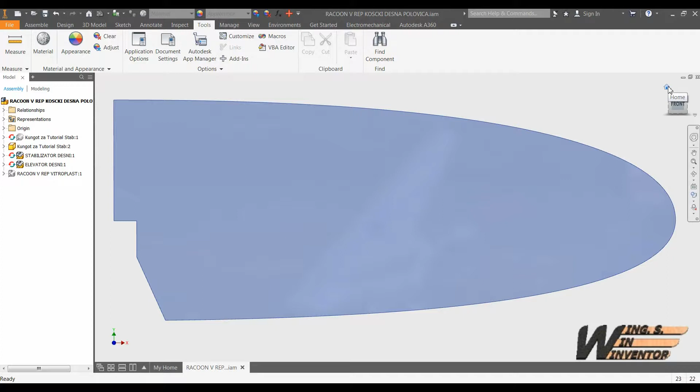Hello. In this video I will demonstrate how to get from this solid to the fully detailed final product without use of any sketch in a so-called take away modeling technique. In the episode number 4 we will design all the parts of the assembly in such a way that they will represent the puzzle which can be assembled together only the right way.

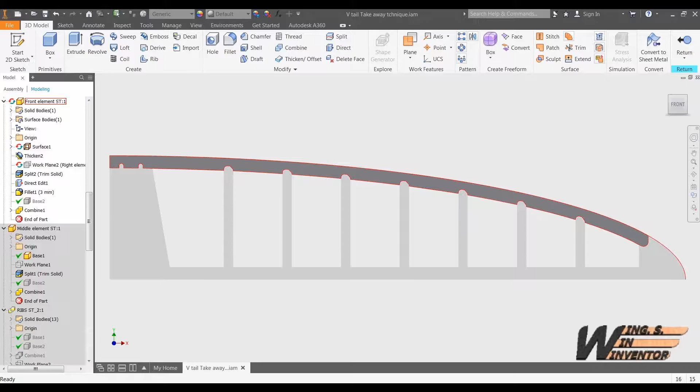We will remodel parts of the assembly utilizing direct edit tools. This is the fastest and most convenient method for changing object shape.

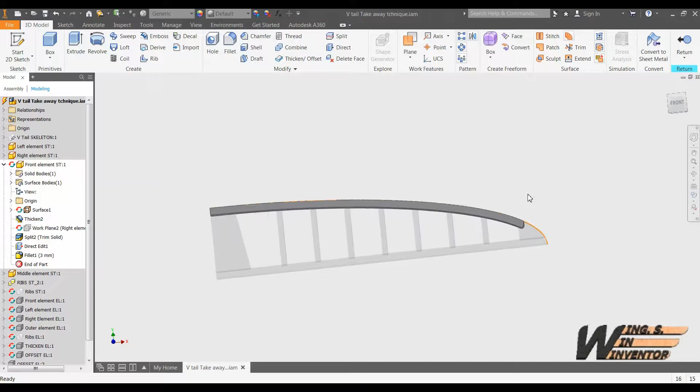Because we are sticking to the takeaway modeling technique without utilizing any sketch, we will slice the root part of the tail assembly into many pieces so that we will be able to remodel its shape utilizing direct editing tools. This will ensure that the part will become unsymmetric and that the user will not be able to flip it over and assemble it the wrong way.

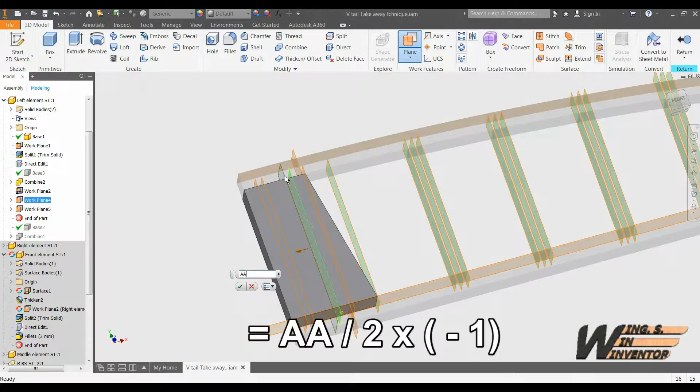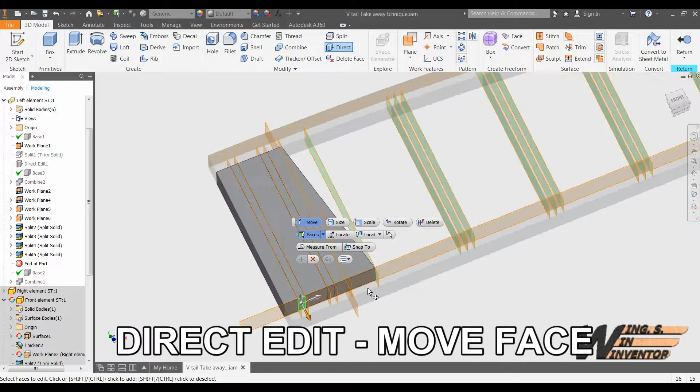Once the part is split into many solids, we can utilize the direct editing tool and pull out the faces that we just created. Pretty simple procedure with a great result.

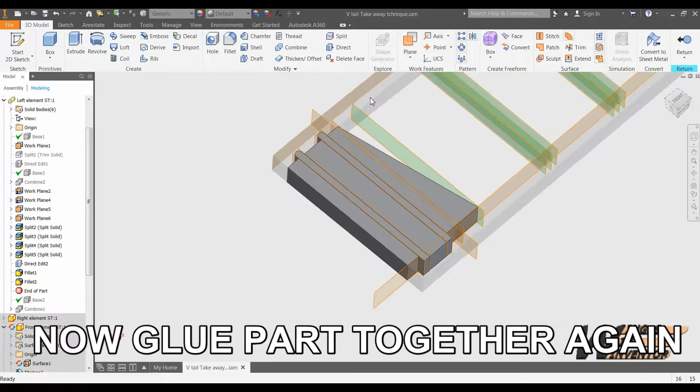Once the part is remodeled and finished, we will simply glue it back together. To do this, we use the function combine with the option add, so the 5 solids will become one solid again, like at the beginning.

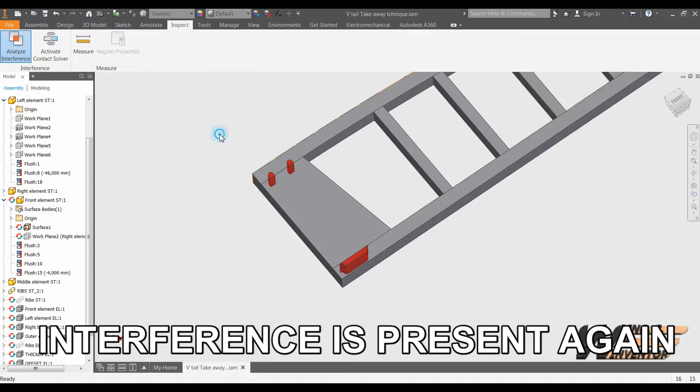We will also remodel all the rib elements. We'll make them longer on both sides. That will enable the final user of the product to assemble them at correct distance. After changing the length of the first rib element with direct tools, we will make also other rib elements longer.

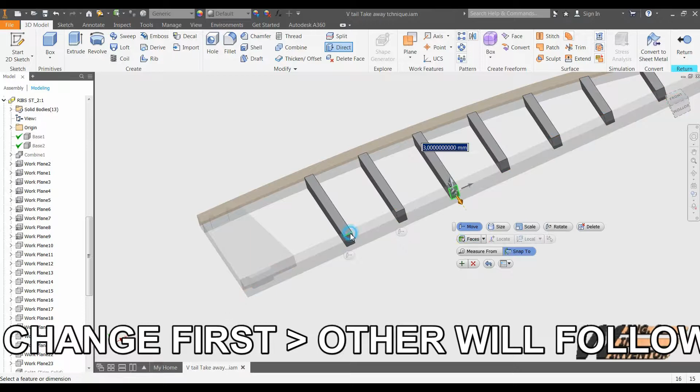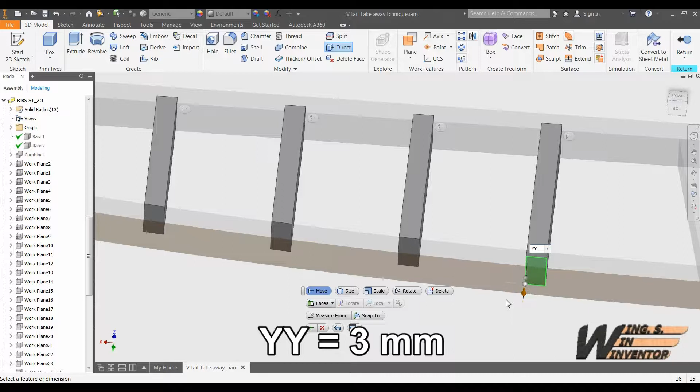Very useful function is the option snap to. In case we want to change the length of the first rib again, all the other rib elements will adapt to the new length. Maybe the option snap to of the direct edit tools is not practical at the ribs' front end. We will utilize parameter YY, which equals 3 mm.

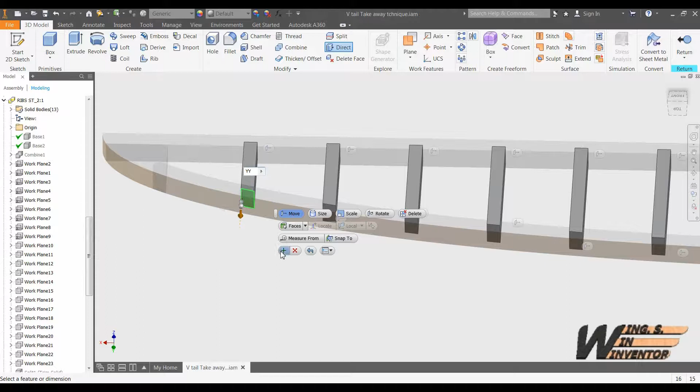At the end of modifying tail ribs, I will add some fillets and chamfers to make orientation of particular elements more obvious. Of course, this is only optional.

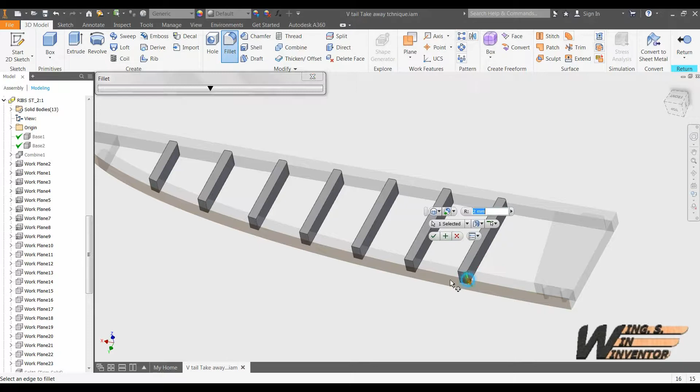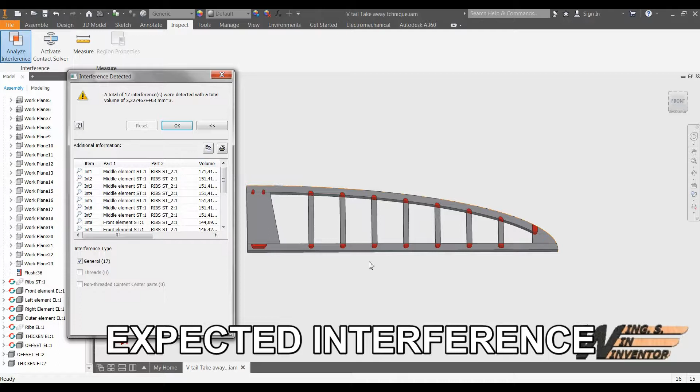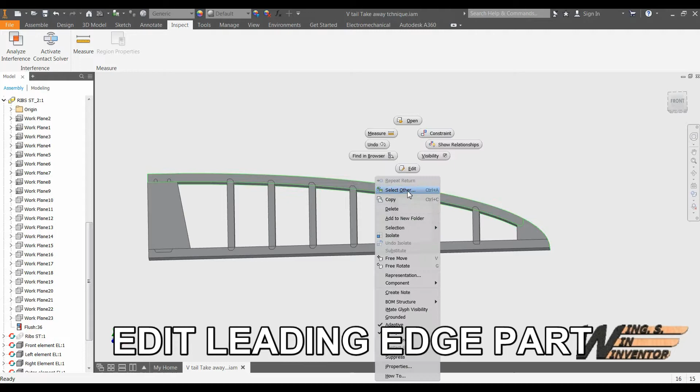As expected, we have incorporated many interferences. We will solve this by editing individual parts, copying parts that are causing interferences, and combining the base part with those interfering parts using the option of subtracting the solids. For obtaining the correct result, the selection order is very important. Follow my moves as seen in the video.

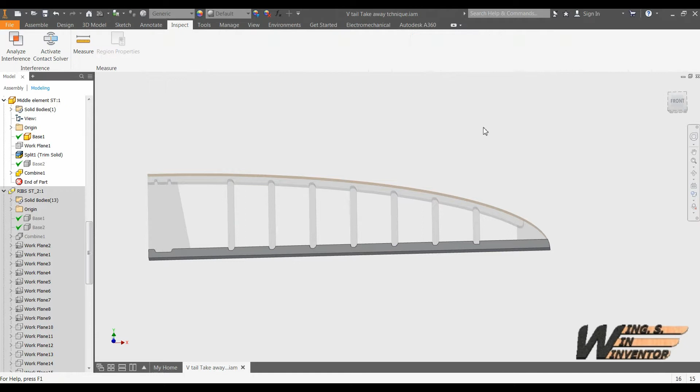Our work is now done. We will just once again check for interference and as you can see by the result, we were very successful. So this concludes the episode of modeling parts without utilizing sketch with the so-called takeaway modeling technique.